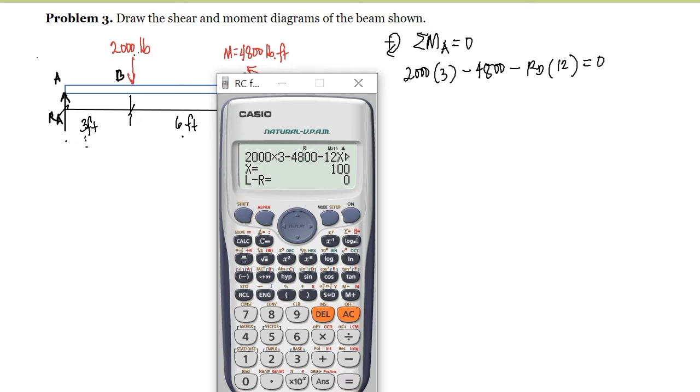Shift solve, we have here 100 pounds. So RD is equal to 100 pounds. Since positive yung lumabas na sagot, meaning tama yung assumption that RD is directed upward. And computing for the value of RA, we have to sum forces vertical equal to 0, taking the upward direction as positive. So RA here is assumed upward, so we have RA

positive minus the 2,000 pound here, which is negative kasi directed downward, plus RD, which is equal to 100 pound, is equal to 0. Bakit hindi natin sinama si 4,800? Because 4,800 is a moment, so sa moment lang siya kasama. Sa forces vertical, hindi siya kasama.

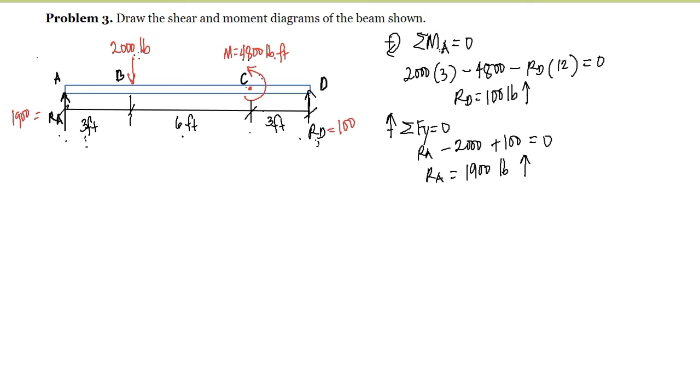So we have here RA is equal to 1,900 pound. And this is directed upward kasi positive yung lumabas na sagot. So meaning, RA here is equal to 1,900 pounds and RD here is equal to 100 pounds. Now, for the segment AB, since we already computed for the reactions of the support, drawing na natin yung shear and moment diagram using the area method.

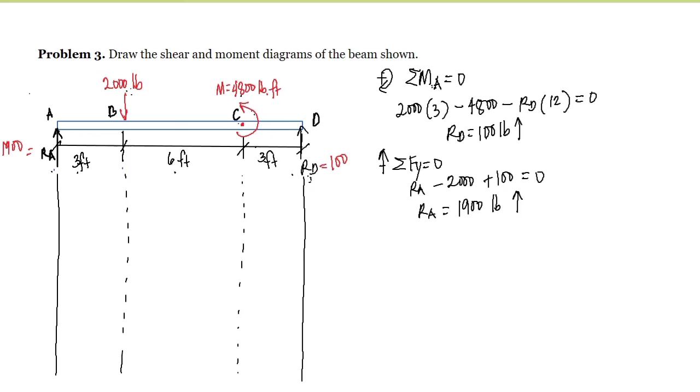Okay, so for the shear diagram, we have 1,900 at support, that's upward, kasi positive. And kung makikita natin dito, our shear at 0 is equal to 1,900. And for the shear at 3, that's 1,900 pa din, since we don't have the load between A and B, so still this is 1,900.

And kung makikita natin dito, we have 2,000 pounds, so ibababa niya ng 2,000 pounds. So minus 2,000, so yung shear natin at 3 ay magiging negative 100. So at this point, we have negative 100. And yung shear natin at 9 is equal to negative 100, yung shear natin at 3, plus the area of the load between B and C. So since we don't have the load, sa 9 is still negative 100 pa din.

And kung makikita natin dito, yung shear natin up to 12 ay negative 100 din. Why? Kasi wala naman tayong area ng load between C to D. So, dire-diretso lang yung 100 hanggang makarating siya dito sa point D. And this is negative 100. And that will be closed by the reaction at D, which is 100 pounds upward. So, 0 na tayo dyan. And for the shear diagram, so ito yung shear diagram.

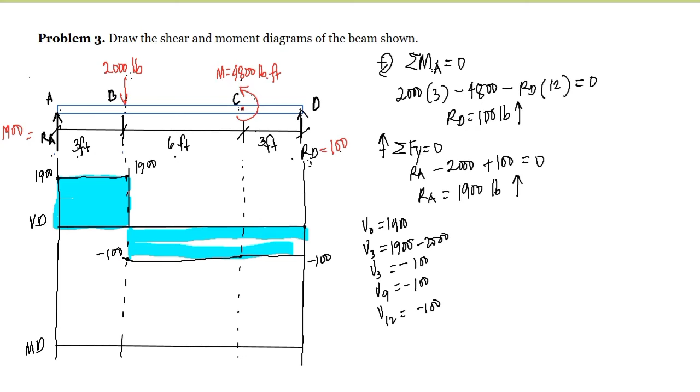Okay, so for the moment diagram naman, so for the moment at A, that is equal to 0. The moment at B is just equal to the area AB. And the area AB ay pangalanan natin area 1. So dito ay pangalanan natin area 2, and this is area 3. So the area from A to B is area 1. That is, the moment at B is equal to 1,900 multiplied by 3 feet. So we have 1,900 times 3, that is equal to 5,700 pound-foot.

So 5,700 pound-foot. So meaning, yung moment natin at this point is 5,700. So since this is degree 0, meaning yung moment diagram natin dito is degree 1 by integration and plus 1. So we have this degree 1 here.

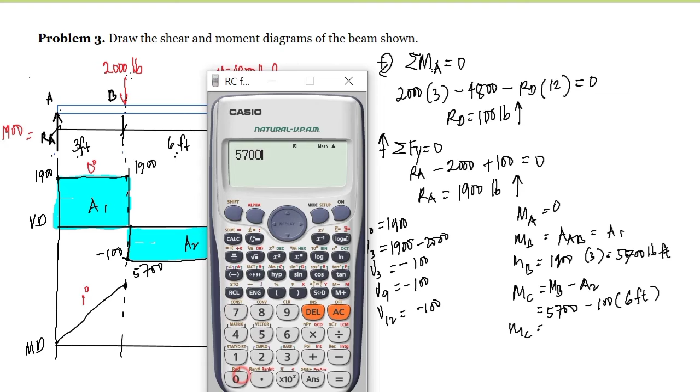And for the moment at point C, that is equal to the moment at point B minus the area 2. And the moment at point B is 5,700 minus the area 2, that is 100, multiplied by the distance of 6 feet. So we have here the moment at C is equal to 5,700 minus 600. Of course, that is 5,100. So 5,100 pound-foot. So dito ay magkakaroon tayo ng 5,100 pound-foot. And since this is degree 0, of course, we are expecting degree 1 here at the segment BC. So degree 1 is linear equation, so we have here a line.

And the moment at point C will be affected by the applied couple. So yung applied couple natin is negative, so that's 4,800 pound-foot. So yung moment at point C natin will be 5,100 minus 4,800, and that is equal to 300. So 300 pound-foot. So yung moment at C natin ay bumaba siya ng 300. So galing dito, papunta doon. If this is clockwise couple, aakyat yung ating moment diagram. Pero since it is counter, so bumaba siya.

And the moment at point D is just equal to the moment at point C minus the area 3. So since we have here the moment at C is 300 minus, this is 100 times 3, meaning the moment at D is just equal to 0. So napasara na natin yung ating moment diagram. And as you can see here, we have degree 0. Of course, we are expecting degree 1 here, and that is just a line. So, kukonect lang natin to. And this is now our moment diagram.

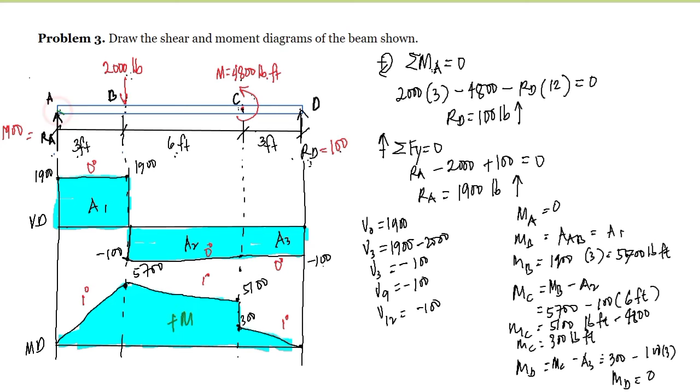So, the possible questions na itatanong, the maximum positive shear, 1,900, and the maximum negative shear is 100, and the maximum positive moment, of course, positive naman lahat ng moment dito. The positive moment here is 5,700. That's the maximum. Okay, hindi natin siya na-drawing, yung possible na bending nito. As you can see here, we have the positive area, no? So, positive moment lahat to. So, yung possible na deflection nito is

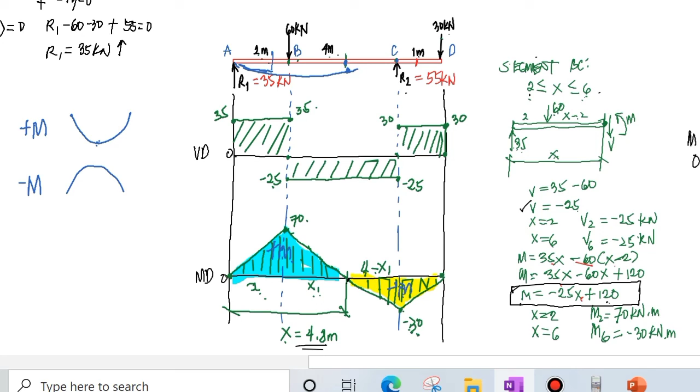pagdating natin dito sa point of inflection, it will change. So, mag-change yung mood mo from positive moment since negative here. Negative moment will make you sad. So, in here, sa point of inflection, it will change from concave upward to concave downward. And of course, here at the support ay wala tayong deflection dyan. So, therefore, dadaan tayo dito sa support and sad. And like this. So, this would be the deflected shape for this case.

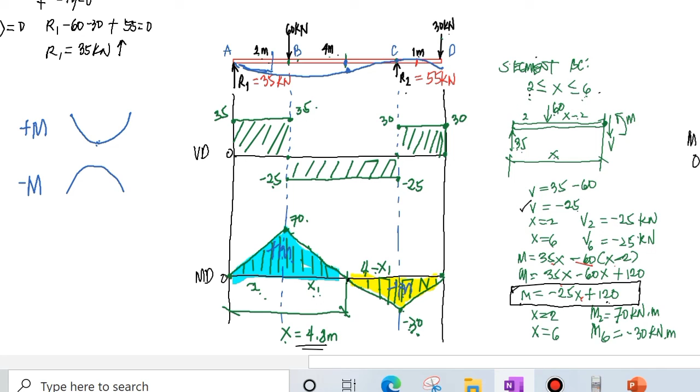And for problem number 2, we have here the negative moment. So, in here, since this is the location of the point of inflection, at the point of inflection, dun mag-end yung curve natin. So at point C, of course, wala tayong deflection dyan. Since negative moment, you would be sad. Nakasimangot siya. So it would be like this. Siyempre, magde-deflect to ng ganun dahil dito kay 30 kN.

And for the positive moment here, the possible deflection here is smiling, no? So from here, ay smiling na, kasi positive moment nga, and it is a curve concave upward. So this would be the possible deflection if this is the loading condition.